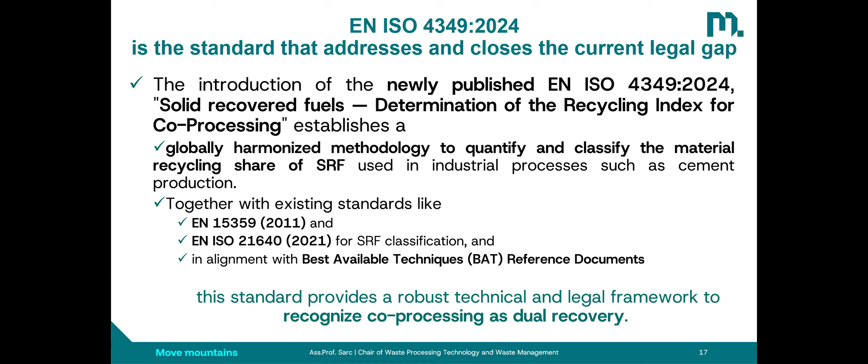Why is it so? Because we have a quantitative indicator at the end of the day, if the monitoring of waste fuel amounts is done properly, and this is nowadays the situation in the waste sector and also in the cement industry. Every truck and every amount of the truck and waste which is delivered and used in the cement industry is documented. There is also a possibility for quantitative indication how much of this material is really at the end of the day recycled. So reporting is possible and should be considered from our point of view.

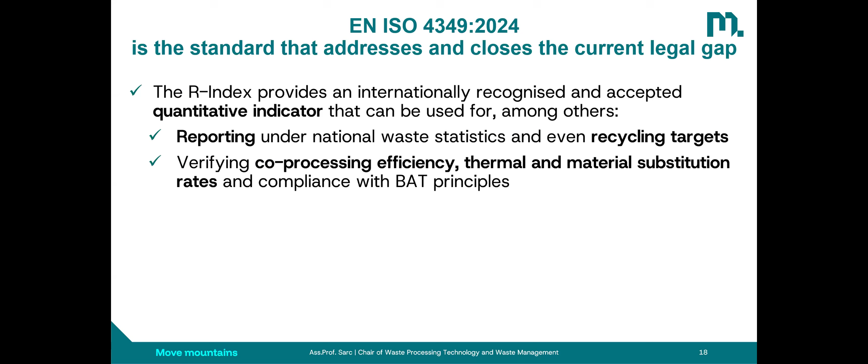Verifying co-processing efficiency, both thermal and material substitution rates, is possible and should also be done. Recycling index supports life cycle assessment. If you take a look on the future development, more assessments will be needed in waste sector, but also in industry sector, especially regarding taxonomy and also other methods which will be introduced for fulfilling different requirements. And recycling index supports also these topics.

At the end of the day, Mr. Trank said that also landfilling is a very important topic of municipal waste, and still too much waste is landfilled in Europe. And this is unfortunately the case. We are still landfilling too much material without any pre-treatment and utilization, and production of waste fuels would solve regional resource and emission problems because the waste which is landfilled can easily be treated.

Investments are in a normal low range level, so you don't need to invest 100 or plus million euros for a waste treatment plant. You can start also with smaller and medium technology plants, but nevertheless you can produce high quality waste fuels which then can be used in the regional cement industry.

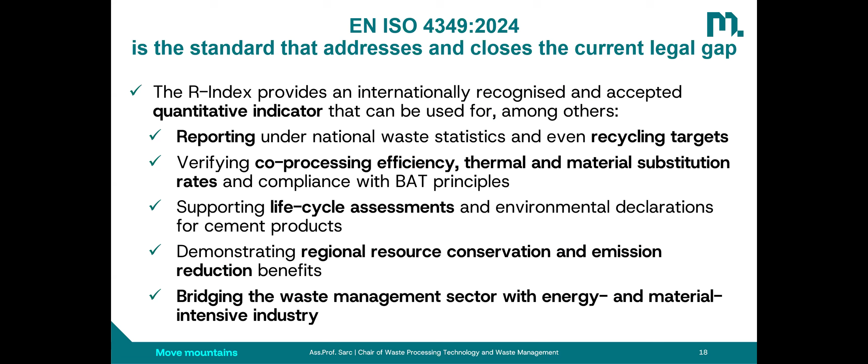So I don't want to discuss the topic, what is better, waste incineration or SRF production and co-incineration, but at the end of the day, there is one option which is the worst one, and this is landfilling, and the recycling index supports this. It's quicker, easier, and with a medium technology level, you can also reach high quality waste fuels.

Some quantifications: how much recycling is there in the cement industry? We have made some assumptions and calculations. If you take a look at a typical average European cement production plant having a capacity of 1 million tons per year, if you use the specific data available from CEMBUREAU and other institutions, and if you use the thermal substitution rate, the average one set for 2030 with 60%, and the average heating value, then you would see that for 1 million tons of clinker production, it is enough to have 120 to 130,000 tons of SRF per year, which would result in 10 to 20,000 tons of materials recycled via co-processing.

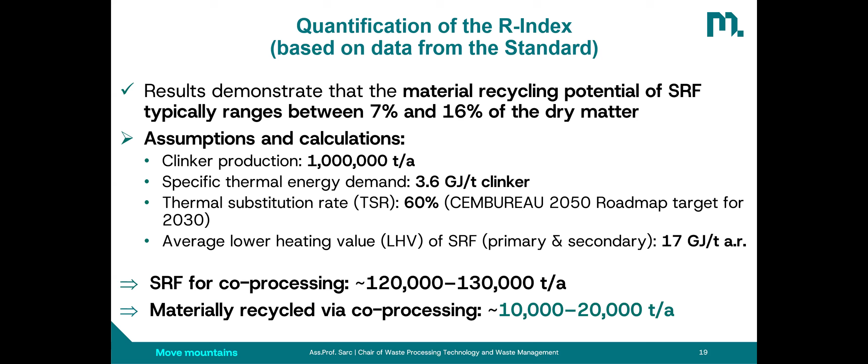So you see here the values. We are talking about significant amounts which could be used also at single local and regional levels.

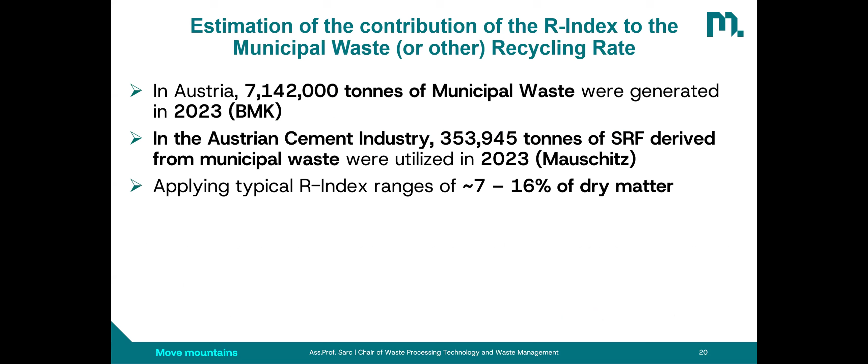If we consider this topic regarding contribution to the national recycling rate, then as an example, I have calculated the situation in Austria. In Austria, we have 7 million tons of municipal waste, which was generated in 2023. In the cement industry, 353,000 tons of SRF derived from municipal waste were utilized. And if you apply the typical range for R index that was presented in the standard, then you see that in the situation of Austria we are talking about a contribution of 0.35 to a little bit less than 1% to the recycling rate.

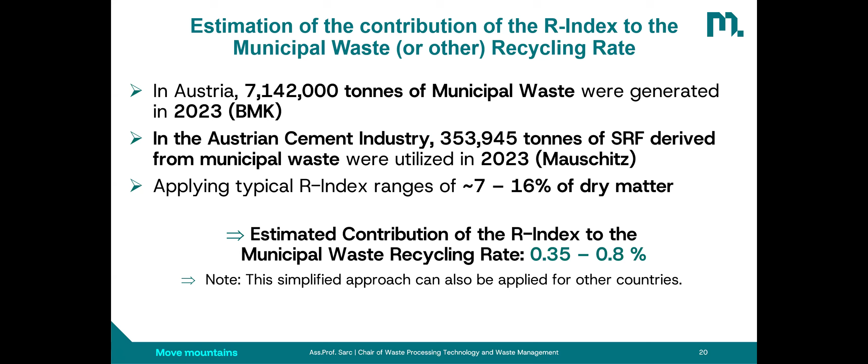So I may also invite all of you to use this simplified approach to estimate the contribution of R index to the national recycling rate in your country. You just need these two figures: the amount of municipal waste, which is published at Eurostat or in your national waste management plan, and the second number is the tons of SRF coming from the municipal sector which was used in the cement industry. I think every single cement industry in the European Union should have this value. And if you combine these two values, you will get an estimated contribution of the R index to the recycling rate.

Finally, which benefits are we talking about? We are talking about some environmental and resource benefits. In the position paper, there are several arguments given, but here I just focus on the main arguments. We are talking about a dual recovery process at the same time. So this supports, on one side, circular economy and links waste management with the industry sector. And this is especially important because we are talking about local or regional levels.

Of course, Mr. Trank also presented some topics regarding waste shipments. Waste, of course SRF too, is shipped in several countries in Europe. So this is a standard procedure, nothing unusual, nothing specific. It's a typical situation on the market, and this is positive. And this is also supporting the regional situation and regional development from my point of view.

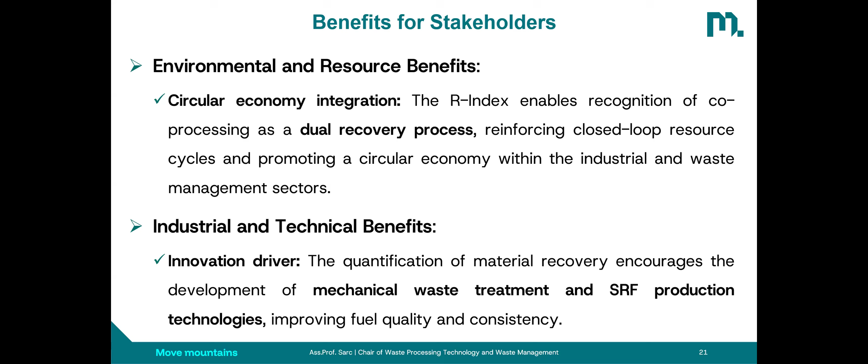As I said before, the recycling index and also co-processing is an innovation driver because at the end of the day, as I explained before, we want to reduce landfilling and want to reallocate waste which is landfilled now without any pre-treatment into the treatment plants and into the circular economy. And landfilling is not a circular economy. It takes waste, it takes materials, it takes green jobs from the circular economy. So it's the completely opposite way of the circular economy.

We also have some societal and policy benefits. At the end of the day, all these documents, Circular Economy Action Plan, Green Deal, and so on, are connected with co-processing, and supporting co-processing means also to be in alignment with these strategic documents for 2040, 2050. Mr. Schneider explained before what are the strategic aims of the Net Zero Industry Act and reduction of CO2 emissions and greenhouse gas emissions in the cement industry. So co-processing supports this development.

And there are also several benefits for other stakeholders along the value chain. For example, for packaging material industries, we have heard from Mr. Trank. He was talking a lot about the plastic crisis. They also will need solutions, and utilization of waste fuels in the cement industry, and not landfilling of plastic, is also one of the solutions. So these industries could also benefit from extended co-processing and reducing landfilling. Extended producer responsibility schemes and systems, and single member states, will also benefit from co-processing.

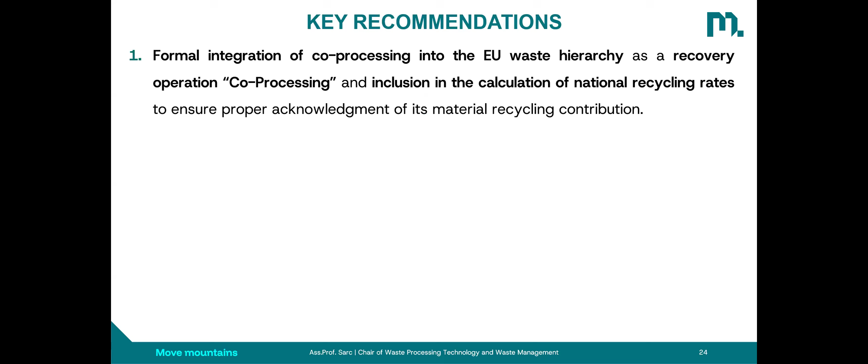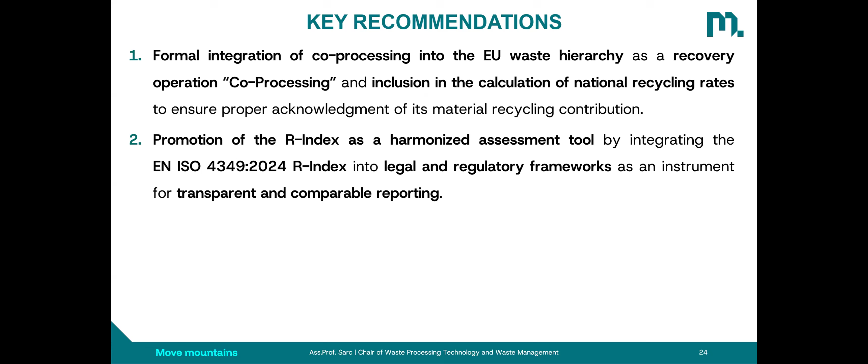The first one is the integration of co-processing into the EU waste hierarchy as a recovery operation, and also inclusion in the calculation of national recycling rates. The second recommendation is that the recycling index is a harmonized assessment tool. There is an international ISO EN standard, meaning worldwide and also applicable in Europe as a European standard, and this can be used in legal documents. The third topic is strengthening regional resource and energy independence by encouraging the use of locally produced SRF in cement kilns and supporting local circular value creation.

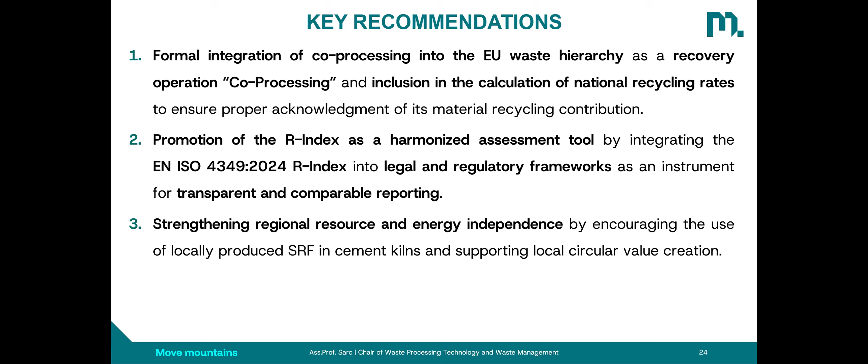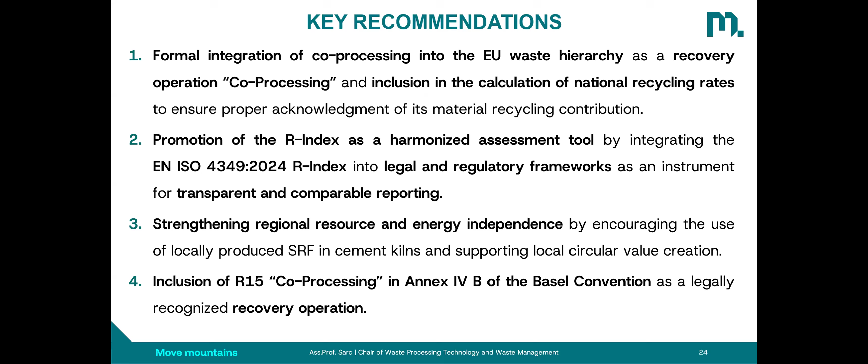And the fourth one is inclusion of R15 co-processing as part of the Basel Convention as a legally recognized recovery operation. So we are talking about energy recovery, but at the same time, we are talking about recycling. So it's a simultaneous, meaningful, intelligent combination.